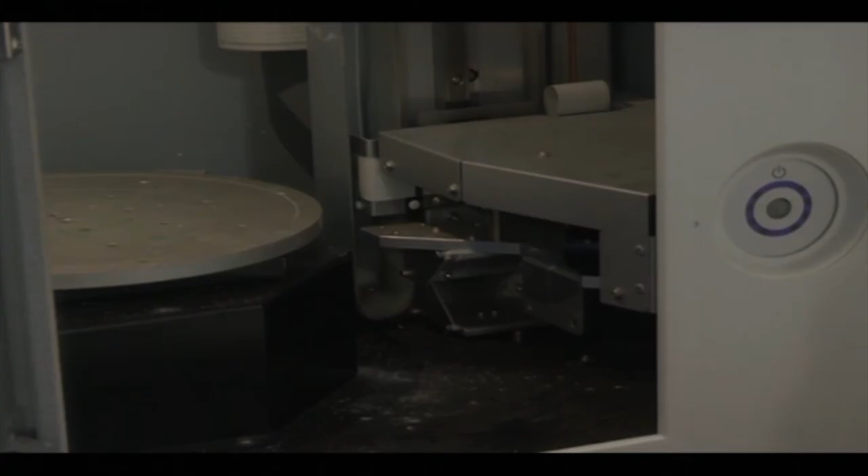In the handheld scanner, soaking time was needed for the laser to get heated and excited. In this case, the soaking time involves initialization of the different orientations, because the camera moves vertically and the table also has to move, akin to homing in CNC machines. This initialization calibrates or checks all the dimensions, whether it can go up to 406 millimeter height or whether the whole scanning can happen up to 254 millimeter.

Next we have a blue button here, the button on the scanner. When we switch this on, you can observe these indications from the button. When the button is dark, there is no light, the machine is off, the power is off. When it is lit blue or red - when lit blue and flashing two at a time, that means initialization is in progress; the equipment is just getting started.

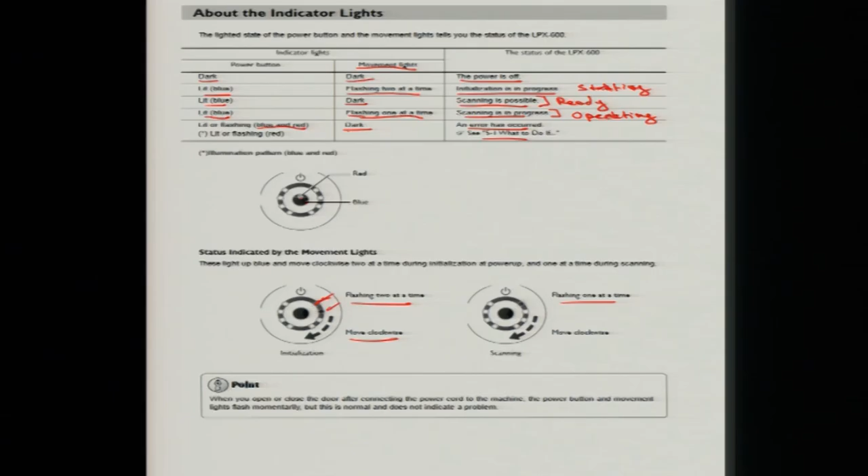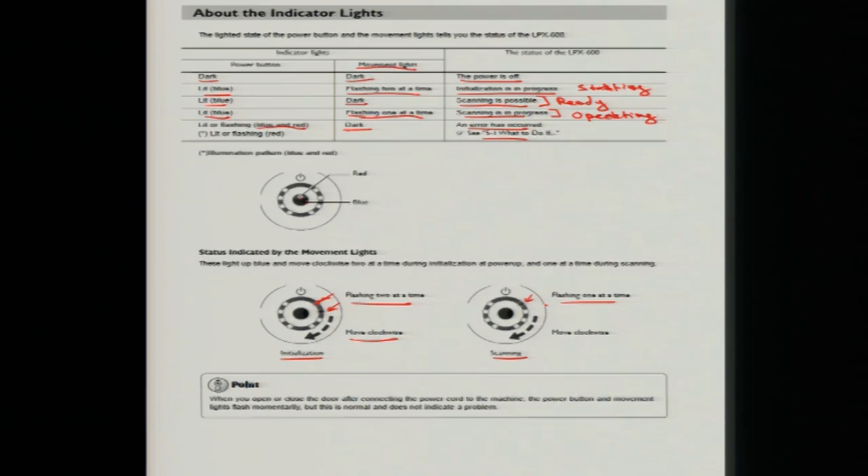When it is flashing 2 at a time and moving clockwise, that means initialization. When flashing 1 at a time, it means scanning and moving clockwise. So when we start this machine, we will observe these indications.

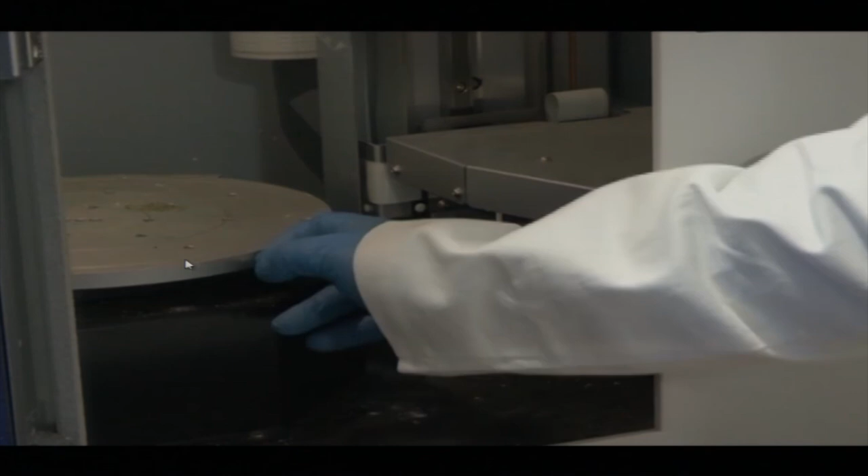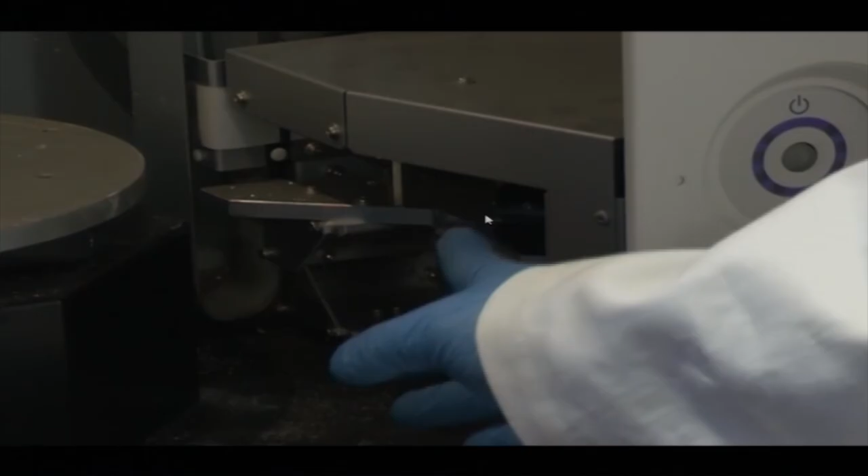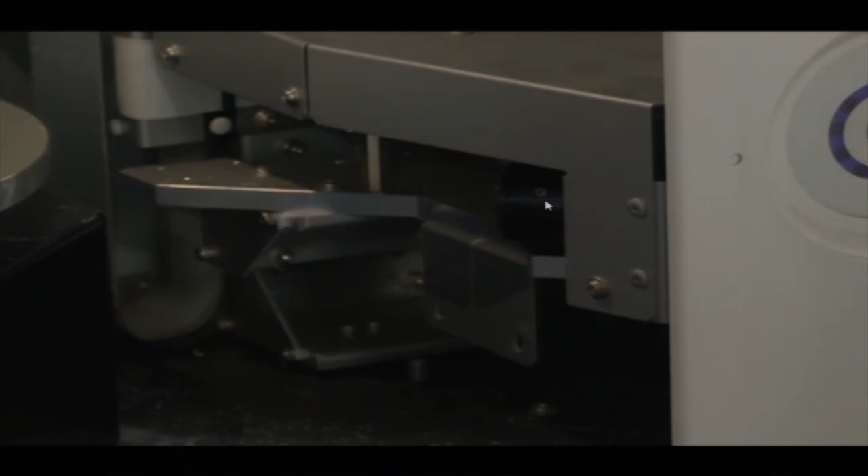This is the inside of the scanner - this is the tabletop, this is the rotary table. The camera is fixed here, and this is the receiver inside; we will try to zoom in and show it to you. This camera and receiver are at a 45-degree angle. There are certain specifications - the optimum angle between the camera and the receiver is 45 degrees.

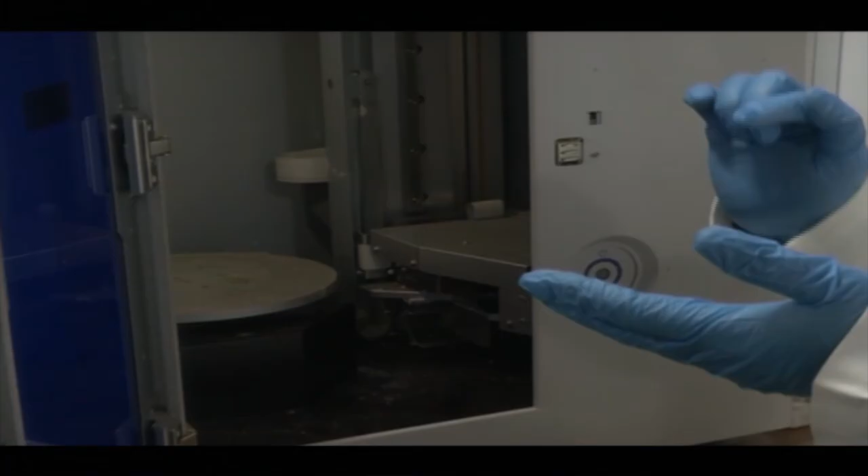So what happens in there? This is the slicing way, like in CMM we have different slices. We had 4 contact points for the circle, then we took our probe at a little height and have another 4 points. So in a similar way we have different slices. There is no raster, there is no overlapping. It all depends on the pitch, the distance between the 2 heights, or in the circumference when we're talking about a rotary object. For a linear object, we're just talking about distances, height and length, and the pitch between them. These are different slices, like different pages aligned and then brought together to form a solid object.

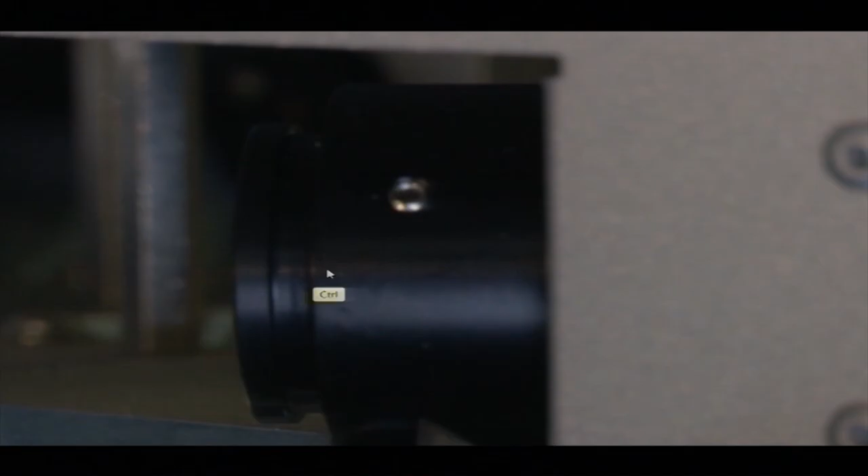So this is what happens here. You can see in the zoomed view, this is the camera, and at the farther end we have the receiver. This is the camera, and the receiver is at the farther end. Here we have the receiver, this is the camera, they are fixed at 45 degrees.

The exact or perfect angle is 45 degrees here, but we can have different angles. However, the angle cannot be less than 20 degrees as mentioned in the manual. It is not okay if the angle between the receiver and the camera is less than 20 degrees.

Also, as you've seen with the rotary table, the object shouldn't go outside of the volume. This is not okay - this is 406mm. It will only scan up to this level; above this level it will not scan. Any object that protrudes beyond the table, or whose height is higher than the specified maximum, cannot be scanned. An area where the laser beam strikes at a shallow angle also cannot be scanned.

The minimum angle it can scan is 20 degrees. Also, the object cannot be fabric - no fluffy materials. It's mentioned here that fabrics and objects with a rough nap cannot be scanned. An object with a comparatively smooth surface is suitable for scanning. So this is okay, this is not okay - this is a smooth surface that can be scanned, this cannot be scanned.

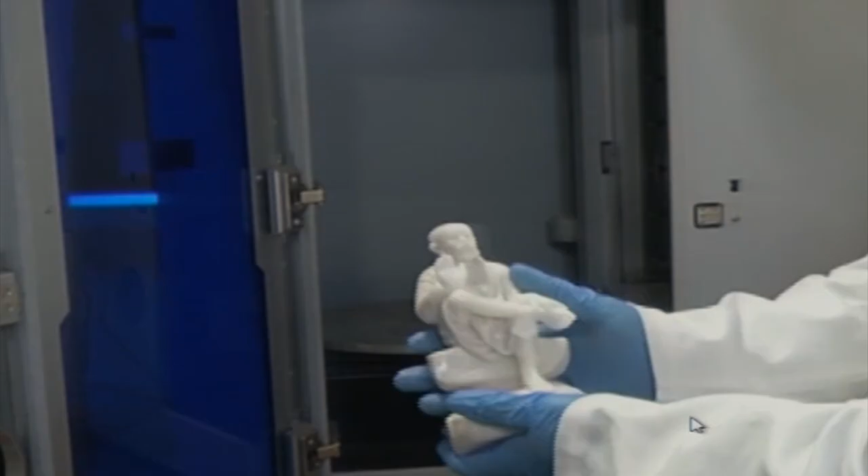So this is the object we're going to scan here - this is a holy figure, a model of a holy figure, and it's all in white color. So this can be scanned easily, we don't need to apply any coat or developer here. We will just put it in the center of the work table and try to scan this.

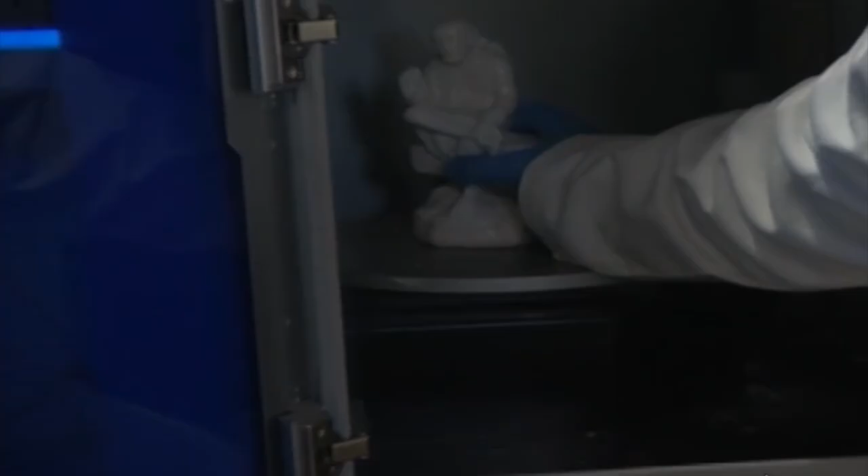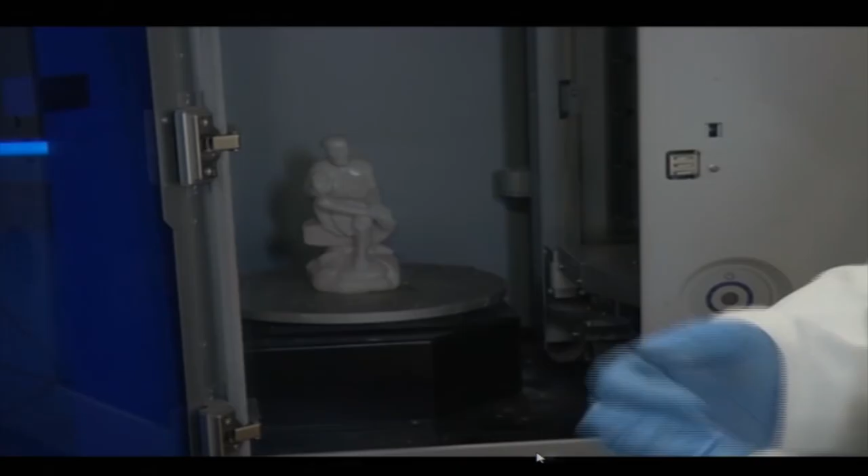Let us put it here, and we will just try to put it at the exact center of the table. Now the camera would put the light and the receiver would receive the light back, and it will try to scan. Let us close the door of this chamber.

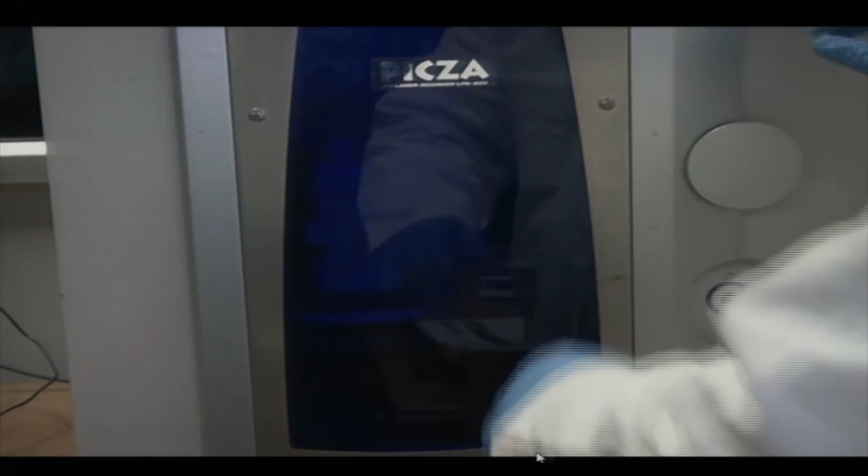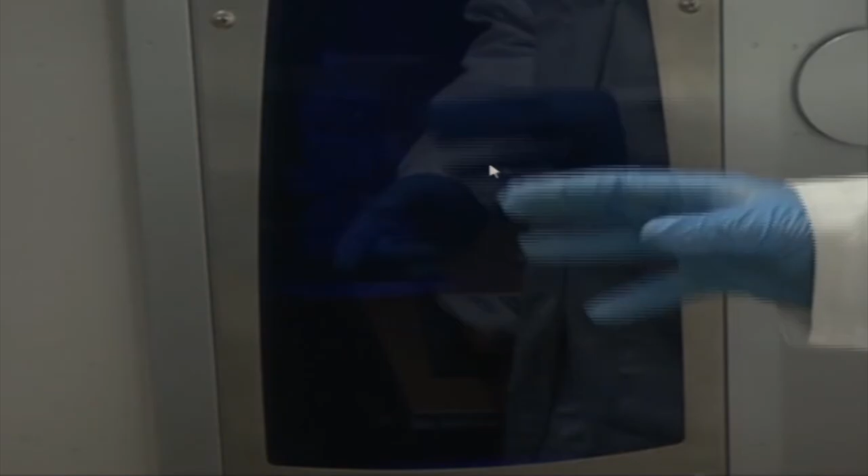So the door is closed. You can observe that the door color is blue, because blue will cancel to some extent the harmful effect of red light.

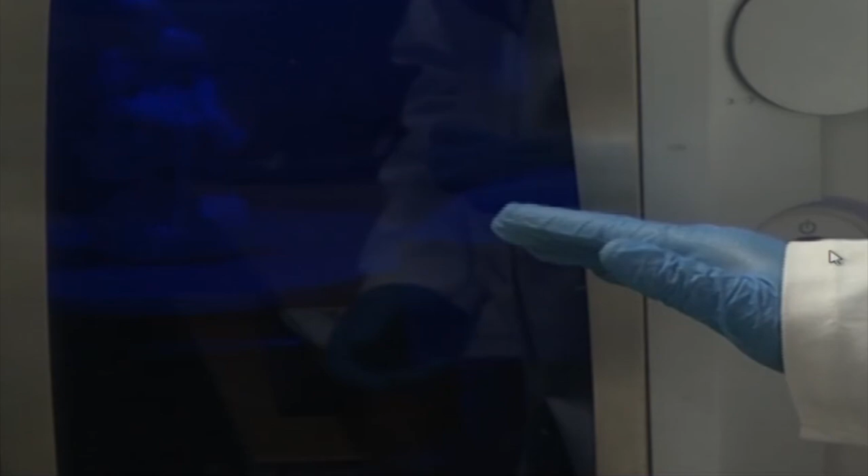So when we switch it on, the initialization happens. This is initialization, with the two lights here. If you can see, everything is moving. This is preparation of the machine, and homing is happening. This is rotating, a complete 360 degree rotation has happened. The camera is moving up and down.

Some light is coming on here and getting left back. It is checking everything to make sure that the machine would work properly. This is initialization. In initialization, the start button was blinking with two lights on.

So now we have put the scanner object inside the scanner, and we have come back to our computer interface. Here we have Dr. PICZA software. This is the shortcut for that.

So we will click on this. So this is the software that helps to scan the object. You click there and this interface is opened.

So this option, there is a big button here, scan, green button. We will click this button. When we click this button, it asks for certain options, rotary and plane scanning.

Rotary is when we can scan objects that are nearly spherical or cylindrical and have smooth curves with little changes. Plane scanning is used when we have few limitations related to the shape of the object. Normally you choose this scanning method.

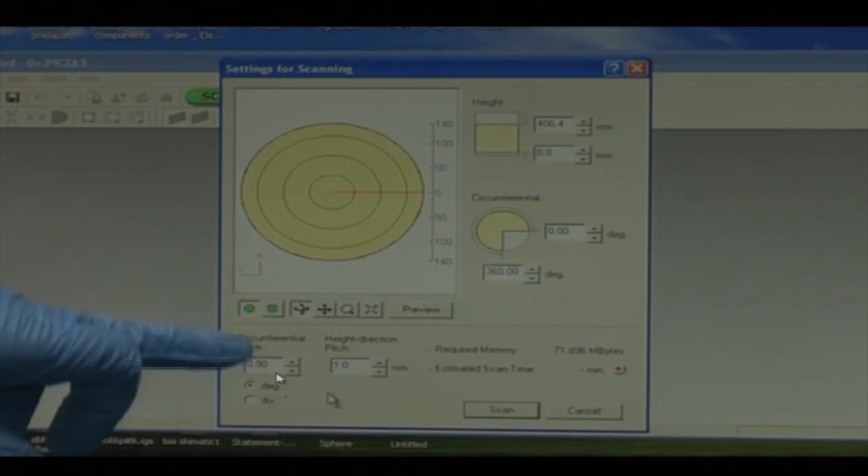So the circumferential pitch is actually given in degrees, not in mm. It is 0.9 degrees. So circumferential rotation is 0.9 degree per scan data, and the camera is going up and down.

So we are changing the pitch here, 3.2 is the pitch - they were just changing the pitch randomly to show you how the pitch is changed. We can increase or decrease the value of pitch here in mm, and in degrees or divisions in circumferential it is 0.36 degrees.

We can increase it into 0.18, 0.44, 0.90 - it is just changing in this way. The resolution for circumferential pitch is 0.18 degrees, which is the minimum value that we can put in, and for the height it is 0.2.

Sometimes we are not sure about the height of the object, we cannot have this height. So what we can do, we can preview - the preview button is here. 406 is the maximum height that it can scan, and we need not scan the whole height, but that will only consume more time. So we can use preview to see the maximum height that we need to scan.

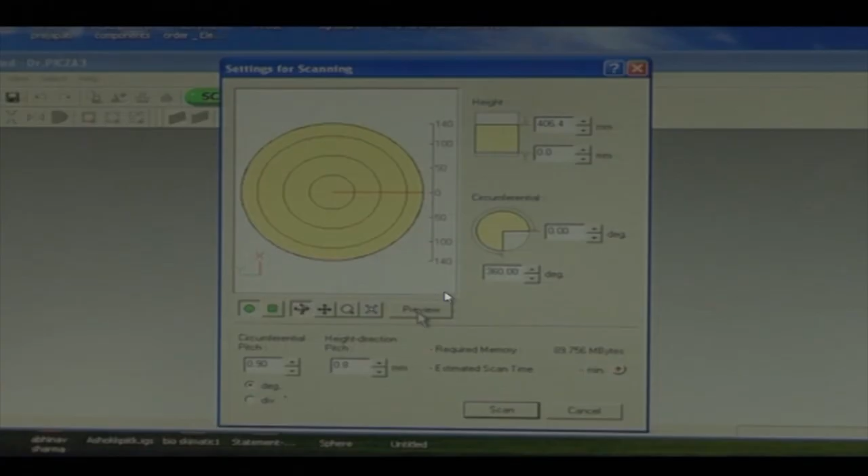So if we click preview, it has started scanning - it is just a quick scanning or check of the height of the object, not the exact scanning. You can see the preview is happening, it is scanning. The light is rotating, a single flash is there.

Now the scanner will read the actual height and diameter of the object and tell us, and we can fix that height. We need not go up to 406 mm - it will decide the height, we can fix that. This is sizing, or acquiring the exact size of the scan. This is just a preview that is happening, not the actual scanning.

So when scanning takes place, it will scan exactly what the preview data has given as input. So this is the rough scanning - the camera is going up and down, the camera is here now.

It is checking the height of the object, the table is rotating here. So the table is rotating and that is describing the circumferential geometry, while the camera is detecting the height. So those things are being defined here.

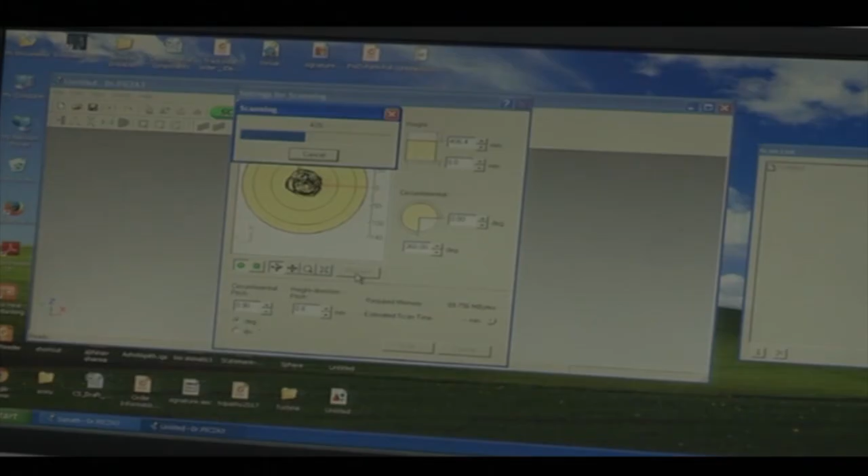On the screen it is also showing the progress. It has shown around 29% of the scanning in the preview phase has happened. It is showing the progress, now 41%, now 43, 45 - this preview is happening here.

Also we can see one thing - it was showing 406 here, 406 millimeters. Now it is showing 172.6 here, which means the maximum height of this object is 172.6, and we need not go to 406 mm. So it will just scan up till this height, the maximum height that it will go.

So it has measured the height of the object up to a single place of decimal. Here we can see the diameter as well. Diameter is from the center line, that is from -50 to 50. It is less than 100. If 50 comes here, 50 is this line, so it is also 50. It is around 80 or less than 80 mm diameter.

So when we go for scan, what will happen? It will just read this diameter, only this diameter and this height. It wouldn't waste time in reading all this diameter and the height up to 406 mm. If we do not choose the preview option, it will just scan the whole volume in the chamber.

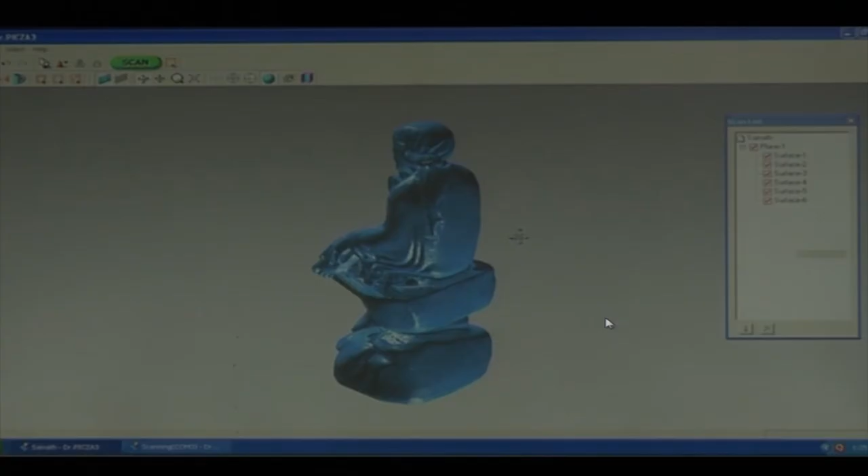So we have obtained the scanned data and full scanning has happened, you can see the body looks like this. This is the model with all the noises and errors, we haven't cleaned the data. You can see there are certain noises here. This is also unwanted lines, these are noises, or the errors. Here also there are certain errors.

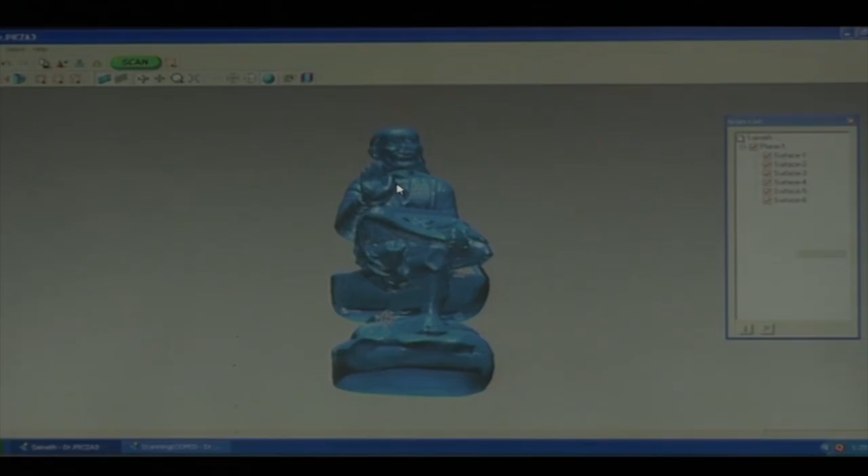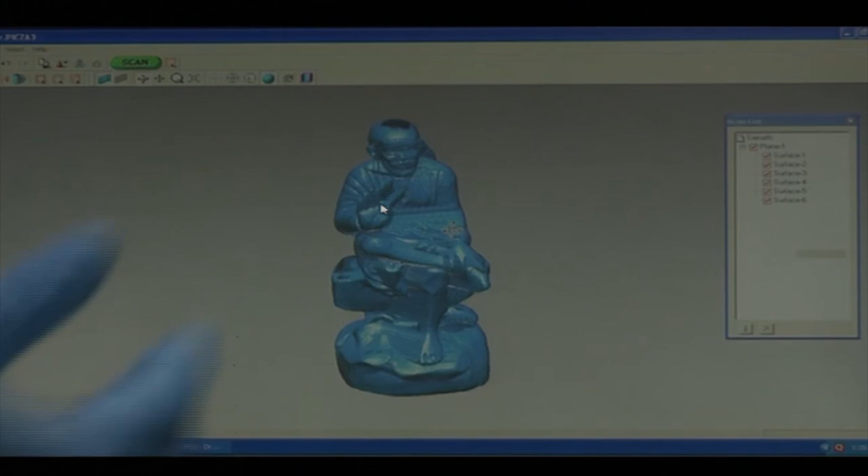So that would come in this complex object when it is not just a simple cylinder. Some errors have come because it could not detect this vacant space behind the hand of the object, it could not detect this, so we need to work on this. Also here there is some recession, some material has not come, but that can be worked on easily using different tools here.

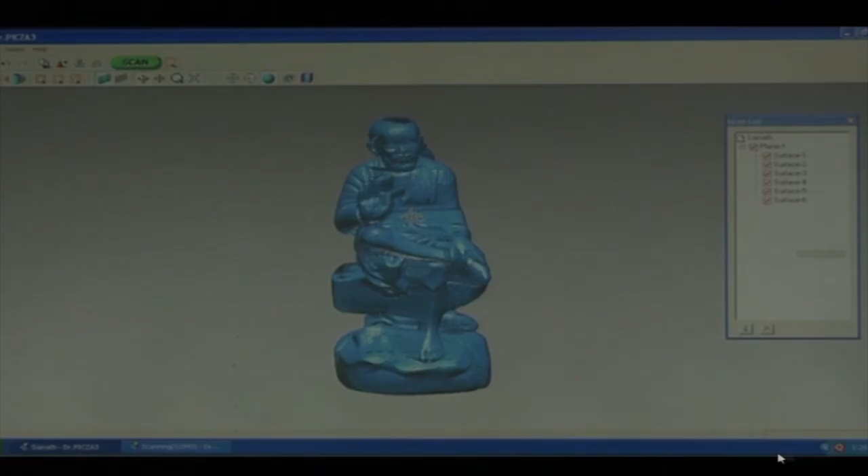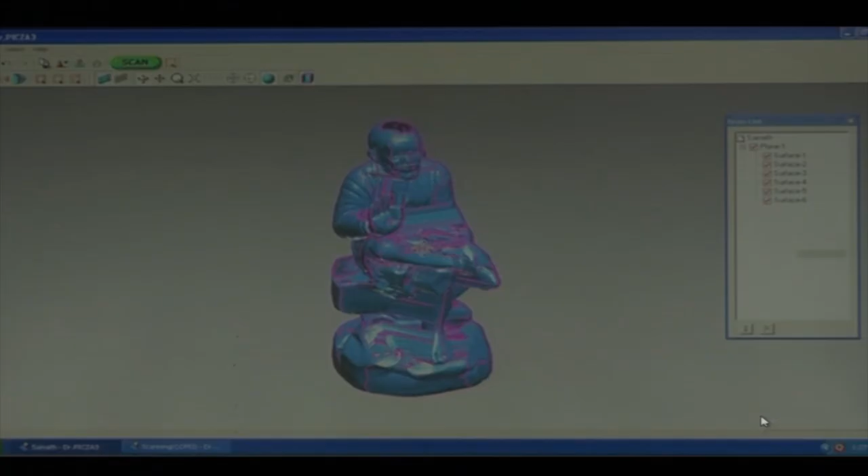So for modifying and rectifying these errors, we save the data in a useful format and go for the modeling, where we work on the patches and surfacing, develop the solid surface properly, and remove all the noises. You can see this view also, these are the colors. Red lines show that some depth or some errors are there. So some noises are being shown here, just to show that there are certain noises.

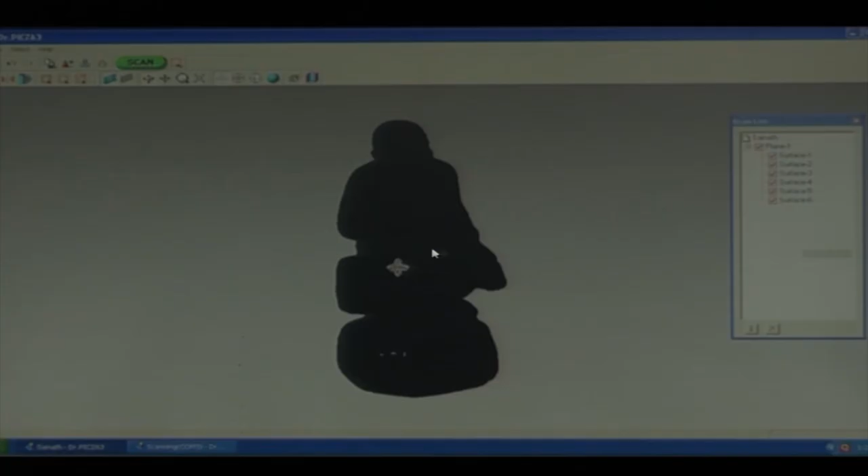So this is the scanned data or point cloud data, shown here as point cloud. It is showing the data in the form of points, and multiple points are being shown up. You can see because the points are too dense, that is why it is showing complete black.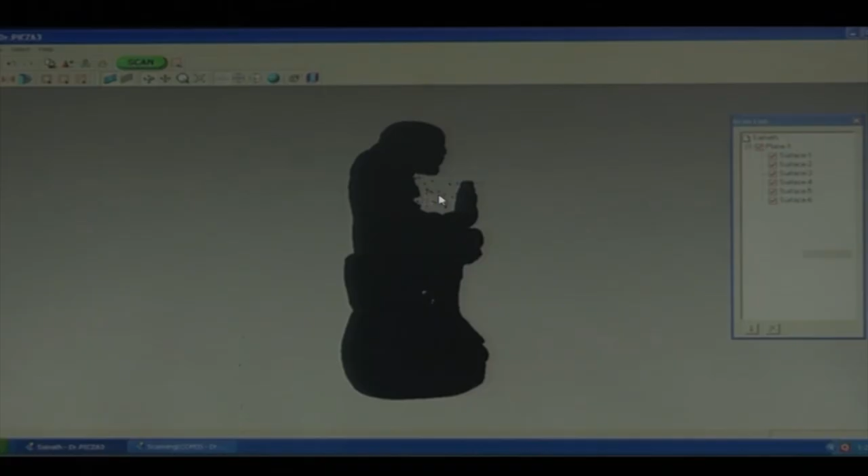If you can see these points here, these points have generated what we call the noise, obtained from these points only, and it has developed a solid from these points. From the point cloud data, we can see the very less dense cloud and remove it from there, that can happen very easily. The automatic surface generation has generated this surface here, you can see this surface is generated here. So it has made a part of the object which is not actually there. We can remove these points, select this volume, these dots can be removed and worked on.

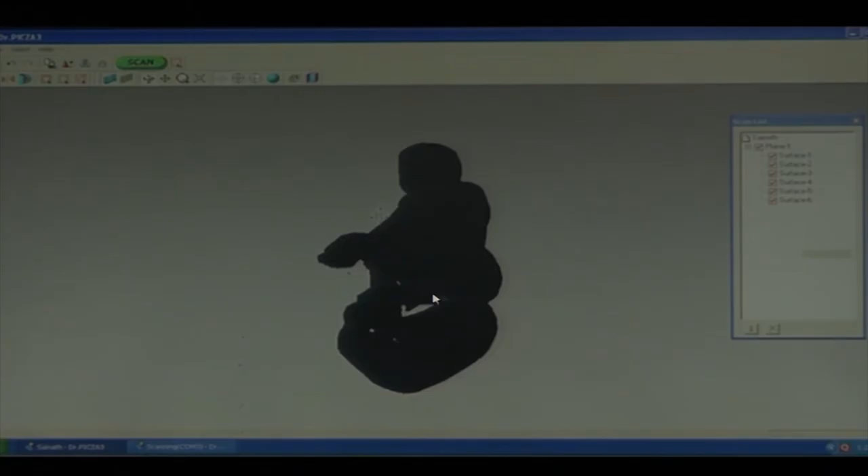So, these are some unwanted dots. There are certain points where the data might be missing; we need to add some patches there. So, all these need to be worked on.

The supporting software is also there that helps to work on this. This is the software provided by Dr. PICZA3. So, the name of the company is Roland.

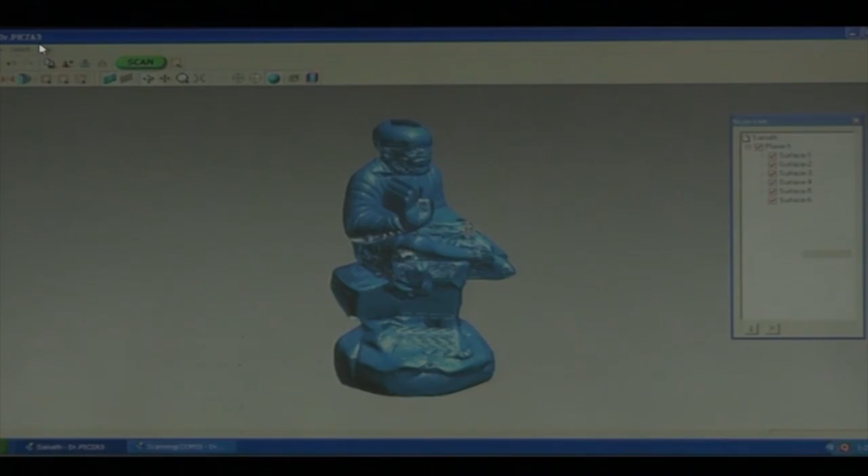These softwares help develop the model for CAM, computer aided manufacturing, and for 3D printing these can be used directly. So, this is the mesh form of the data, this is the raw form of the data. When these are the patches, those need to be worked upon.

So, this is density. So, these are all pixels in a way. These are empty spaces where patches need to be put on. So, this is the way we have produced the data.

The fifth step is, while viewing the preview, we need to do the following settings. We need to select the scanning pitch and finalize whether it is okay. Then we can scan properly.

We can even specify from 1 to as many as 6 surfaces when scanning. It is a good idea to decide on the number of surfaces to match the shape of the object. The scanning angle is the angle of the laser for each surface. It may be a good idea to set the preview to top view.

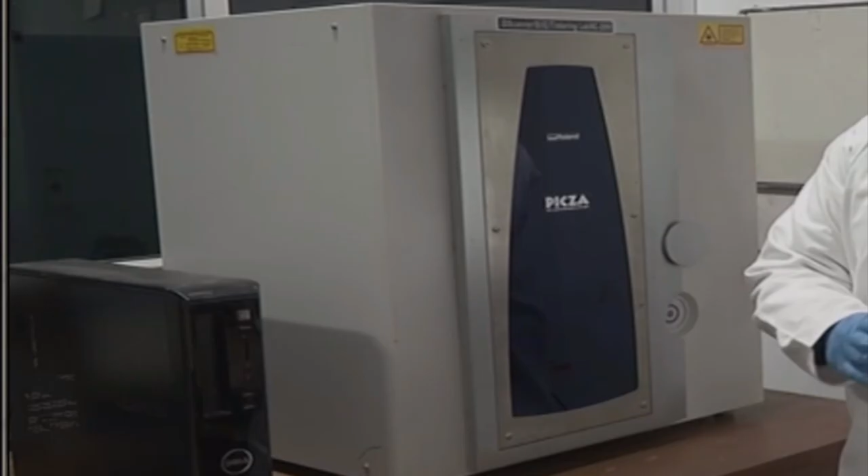We haven't worked on data cleaning and generating the solid model completely. We haven't covered all the commands because that would need an extensive presentation of maybe 4 or 5 hours. So we tried to complete just the laboratory demonstration of how to operate the 3D scanner, which was the Dr. PICZA LPX 600 model. In the previous lecture we saw the Artec 3D Space Spider scanner, and also the coordinate measuring machine, which is a contact type of 3D measurement.

With this, reverse engineering and 3D measurement parts are over. Next we will start with the rapid manufacturing processes. The very first process Professor Ramkumar will discuss is the polymerization process. Then we will come to powder based additive manufacturing or rapid manufacturing processes, which will come next week, and a couple more processes will be discussed in the forthcoming weeks.

Then I will discuss rapid manufacturing materials, post processing concerns, and rapid product development. In rapid product development, we get the CAD data and try to develop the product rapidly, in which selecting the proper layout for additive manufacturing is also important. Factory simulation can also happen. These things will be discussed further in the course. So let us meet in the next lecture, next week. Thank you.